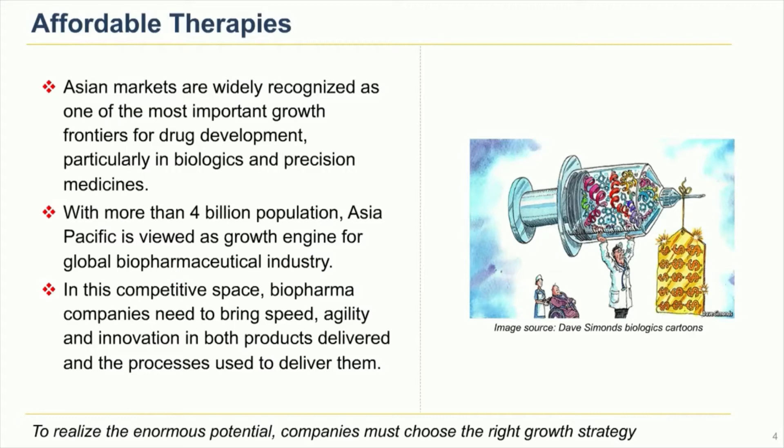Why is that? Because we have a 4 billion population, and Asia Pacific is also viewed as the growth engine for the global biopharmaceutical industry. It is a competitive space, and there is competition in everything that we do. So how do you make a product and how do you win with the product? That's where we need to bring in speed, agility, and innovation in whatever we are doing, in the product that we develop and deliver, including the process that we use to develop that product. All that becomes a part of the affordable therapy that anyone tries to develop. So it has a huge impact, enormous potential for the companies, and they need to choose the right path.

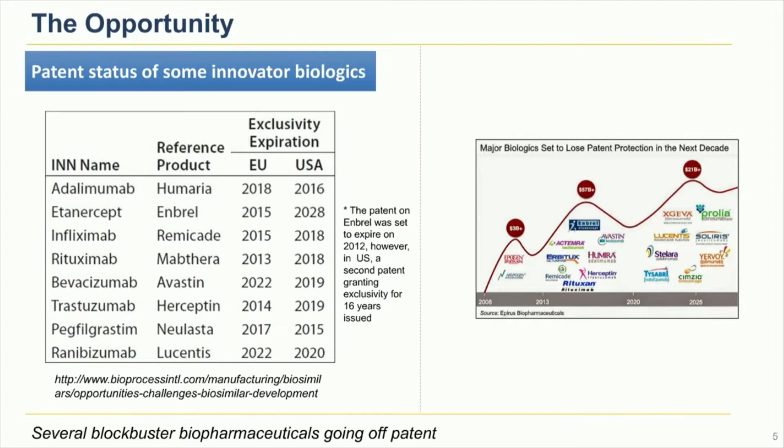Going into slide number 5, I detail the various opportunities that we currently have in the biologic space. It is widely known that many of the drugs are becoming off patent. If you look at the top 8 biological molecules listed on the slide, in terms of freedom to operate, in both the US and Europe, most of the drugs are already off patent, and some of them are very near going off patent, so that most of the companies in the development path have the freedom to develop the product and market the product. This is a list of the top selling products. But what it clearly says is that several biologics and biopharmaceuticals are going off patent, and there is tremendous scope for companies to develop them and take them into the market.

The opportunity starts with the high cost of branded biologics, and also in countries like China, Brazil, Russia, they are trying to be independent. Right now, if you look at the availability of biologics in the space, they either have to import the molecules from countries outside. But that's the area where they're also trying to get into manufacturing and supplies themselves. So that's also giving those markets an opportunity to build domestic biologics.

Okay, I'm going into slide number 8. I'll talk about the regulations. We see the regulations are also evolving. Not all countries have the same type of regulations. From the guidance point of view, we already have detailed guidance from EMA, the US FDA, and WHO, which have set the general principles on how to demonstrate biosimilarity in terms of quality, safety, and efficacy.

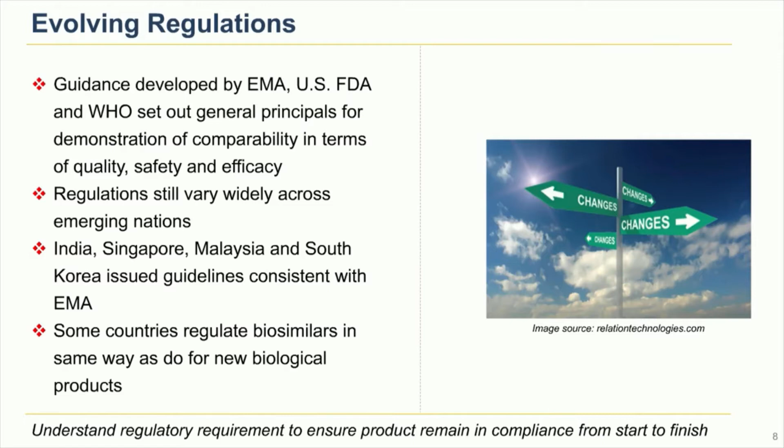Some countries have their own regulations, and sometimes they look at a biosimilar molecule as a new biological product. That's the way their FDA looks at it. So it's very important to understand the regulatory requirements to ensure that the product remains in compliance from the time we start developing till the time we push the molecule into the market. That's about the regulations. Let me go to the next slide, slide number 9.

Right. Let's see. Cost of goods is again a buzzword in manufacturing. Be it development or manufacturing, it's the buzzword. Why is it important now? When we start investing, it becomes very important. We need to understand when to invest, where to invest, and how much to invest. If we invest in too small a capacity, sometimes we may face stock-outs because we're not able to make as much as the market needs. If we invest in too much, it adds to the overheads and the cost of goods goes up.

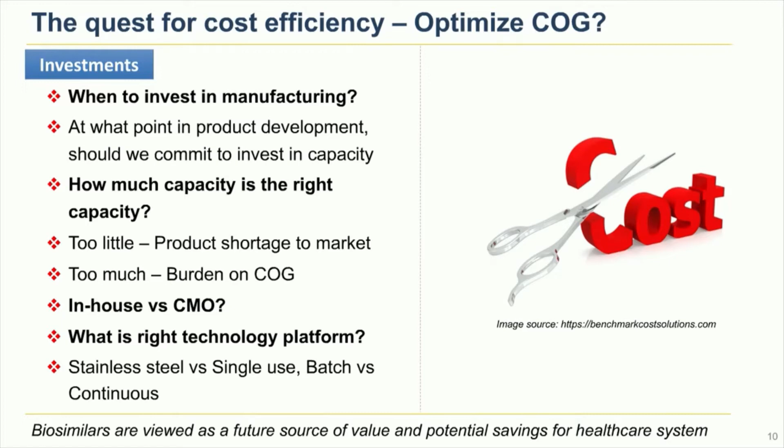We also need to take a balanced view on whether we should do it all in-house or go to a CMO and take their help in developing and manufacturing the product, and what the right technology platform is. So that's where I'm going to spend the next 10 minutes, on the various technology platforms we have. Should we use stainless steel or single-use systems, and should we do a batch process, perfusion, or continuous? These are the various questions one needs to ask and work on when working towards cost optimization.

There will be challenges, and there are challenges. One is funding at the developmental stage, and the other challenge is the scaling. I talked about in my previous slide about the scale of manufacturing. Many times our calculations go wrong on the scale. We assume the requirement at a particular scale, we do everything at that particular scale, and suddenly the scale looks too big and the product goes in the inventory, or sometimes it is too small so that we have to scale up and then do a lot of rework and validation associated with that.

So that's a challenge that we need to understand, and meeting regulatory obligations is again a challenge because of various requirements coming from various areas. And also now, if you look at what's happening across the world, a lot of innovative companies like the big pharma companies are also coming into the biosimilars. That also gives a big challenge and competition to the small biosimilar manufacturers developing the molecules.

Let's see what is the right technology platform. If you put the question, what should be the right technology platform? In my opinion, it should be robust and manufacturable. When you say robust, if you have multiple products, again and again, we should be able to use it for manufacturing purposes. The product that you are making should be consistent, it should be competitive in terms of the cost of goods, and as long as you have a standard platform, we should be able to make the changes both in the product and also in the process. From that point of view, it is important to have the right technology platform.

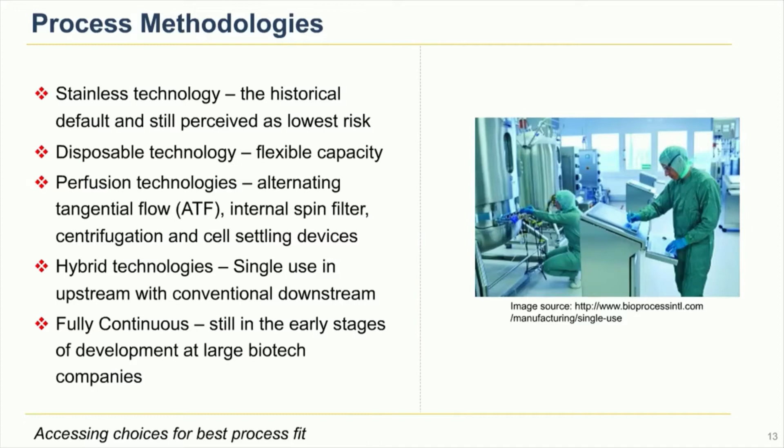Hybrid technologies: someone who doesn't want to spend a lot of money, wants to be competitive, and is worried about the cost of goods. Many are going into the hybrid technologies where they use single use on the upstream and then put the entire downstream in a conventional way of purification. Then we also have a fully continuous system, a technology that is coming up. Everyone is trying to understand it. I would say it's at an early stage of development for the large biotech companies, even though some of the small biotech companies have already started implementing it. So what is important here is assessing the choice of the best fit.

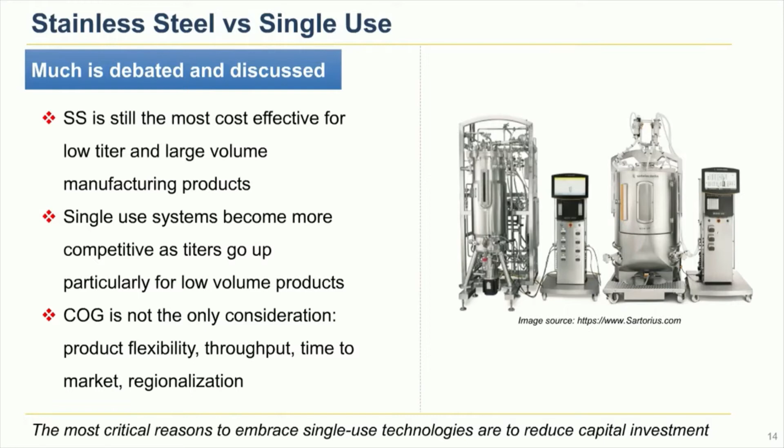The entire volume handling goes down, and cost of goods is one of the considerations that we should bring, but we also look at the flexibility, throughput, and the time that we take for a facility to come up and take the product into the market, and regionalization, how easily we can have the plant set up. All that has advantage with the single-use systems. If you look at the market, most of the manufacturers embrace single-use technology because it reduces the capital investment. Why low capital investment? Because low capital translates to lower fixed costs and less financial risk. That's the reason why single-use has its own advantages. I talked about the timeline for implementation, which is much shorter with single-use systems. It is also flexible, we don't do CIP, SIP, it saves an enormous amount of water, and it is also cost effective for low volume biosimilar products.

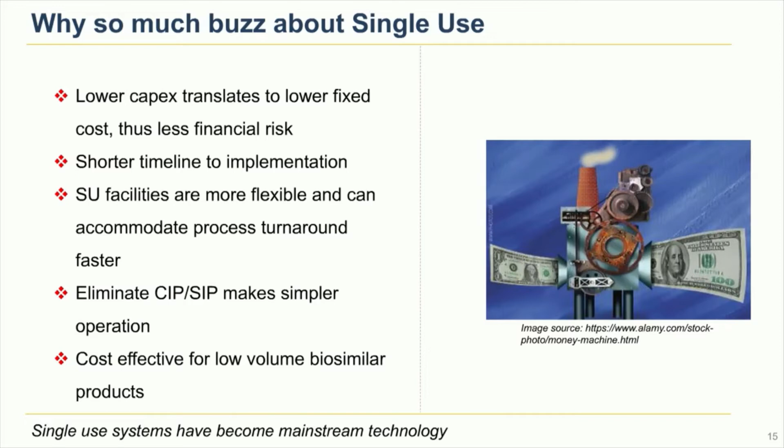If you have a very low volume product, we don't need very large 20 KL fermenters to manufacture these types of products. And most of the companies, as I said earlier, already use single-use systems as a mainstream way of manufacturing. Now, I will introduce this new concept called continuous processing.

By definition, any unit operation is continuous if it is capable of processing a continuous flow input for a prolonged period of time. That's my definition of what continuous is. If you look at the history, this has been adapted in many other industries, like the automobile industry, where it is widely used. But wherever there are capital-intensive sectors, this technology has been adapted. If you ask, are biologics and biosimilars capital-intensive? Definitely yes, it is very capital-intensive.

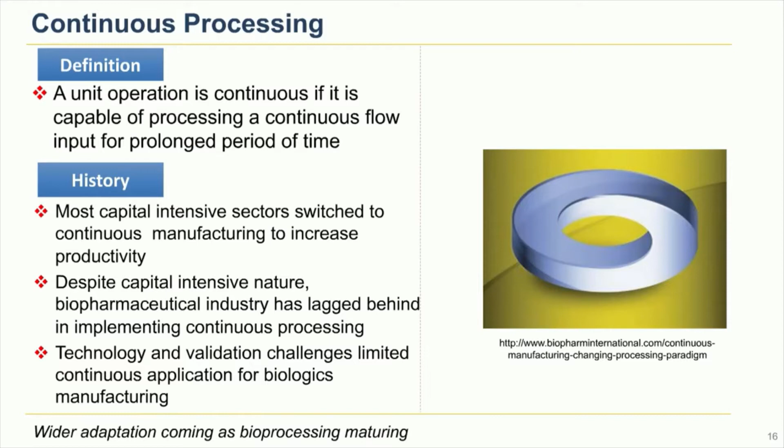But when it comes to the adaptation and validation of continuous processing, it has been a bit slow because of some of the challenges. In my coming slide, I'll talk about what those challenges are. Let me talk about the strategies for continuous manufacturing. I'm on slide number 17.

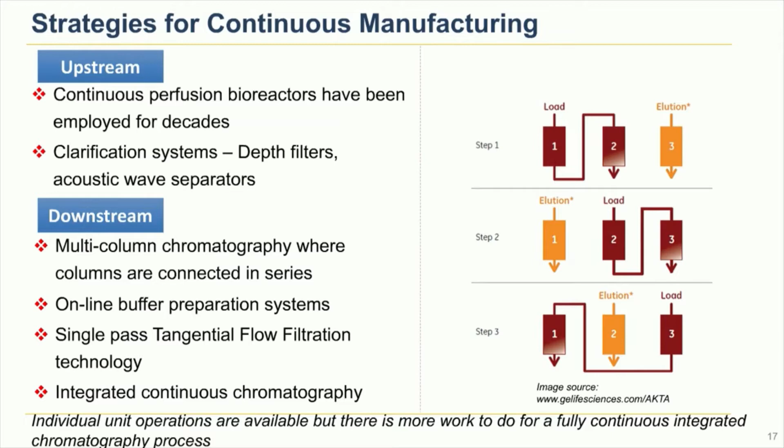If you look at the various options we have in upstream, we have continuous perfusion reactors, which have been there for decades. In clarification systems, we have depth filters and acoustic wave separators, which are coming up now. Downstream, multi-column chromatographies connected in series, online buffer preparation systems, single pass tangential flow, integrated continuous, and a way of integrating all of this are some of the strategies now available in continuous manufacturing. Slide number 18. Let's look at some of these.

What's the advantage that this continuous system will bring in? One is, of course, the cost. Because of reduced cost, it uses smaller equipment, and smaller equipment generally costs less and requires smaller facilities. So the entire cost of running the facility is much less with continuous bioprocessing. Productivity: since they are operated continuously, we need little space for storage vessels and a lot of other buffers that are required in the manufacturing process. And we can expect higher yield. The overall FTE, full-time employee, requirement might be slightly lower compared to the conventional process.

Quality, of course, depends on the product and the process. If you have a product which is a bit challenging in terms of quality as it gets degraded with time, continuous is a way that you have a hold on the quality of the product that you are making, and of course the protein degradation. It also brings flexibility because of more adaptability and facility utilization, and if you want to replicate the facilities elsewhere, I think that's the way it's going to be. And there are a lot of other advances happening in areas like computing technologies and mathematical modeling. All this has facilitated the adaptation of continuous manufacturing.

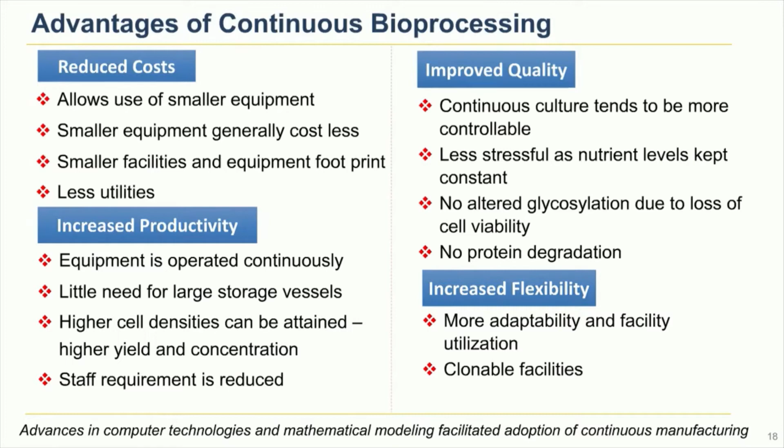Okay, I'm on slide number 19. Let's look at, I think I skipped one slide. Let me go back. Okay. Sorry. I'm on slide number 19.

Let's look at adaptation of this particular technology in biosimilars and biologics, be it a biosimilar or an innovative molecule. If we look at the adaptation, interest is on the rise. I know that from my own organization's point of view, and over the years, FDA has many times been vocal in giving support for continuous manufacturing, which also gives confidence to manufacturers in embracing this technology. It also opened up a lot of options for making continuous manufacturing feasible. I read one report of BioPlan Associates, which says that 10% of current products are being manufactured through either perfusion or continuous downstream processing. So 10% is good to start, and I'm sure in the coming years it's going to go up.

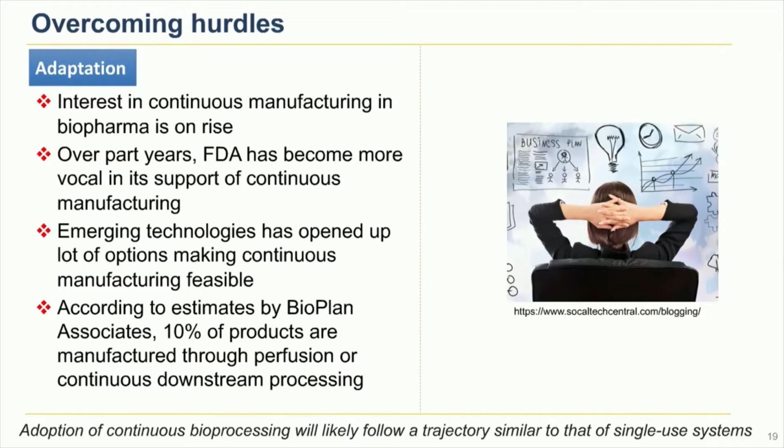One thing I could definitely say is that the adaptation of continuous bioprocessing will very likely follow the trajectory that happened with single-use systems. Now, single-use systems are in every facility that we go into, and likewise, as we move forward, I think we're going to see similar adaptation of continuous technology in almost all manufacturers.

This is my last slide. In conclusion, I'm going to say the markets for biosimilars are growing exponentially. We have seen that not only in Asia, but in every emerging market also. And it's very important to have smart technologies. That's the key for the success of biosimilars in these markets. And from the Asian market point of view, Asian markets offer huge potential for local and global pharmaceutical companies which are developing these innovative treatments.

And the companies will be successful only if they strip away the cost and deliver the value-driven product at a price that the market requires or the market demands. And similar to single-use systems, the continuous bioprocessing in the near term will see a very increasing adaptation.

That's all I wanted to say and talk to you about these various technologies, various technological solutions which are available for all the manufacturers who are in the biologics space.

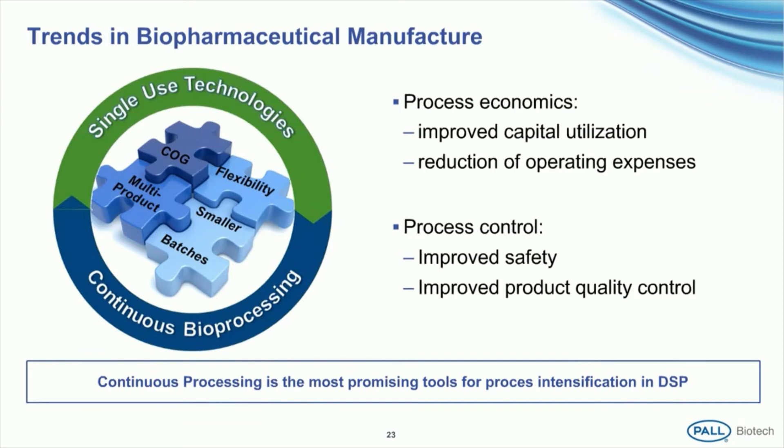After cell harvest, we're using the exact same process steps, including, for example, same filtration media, same chromatography resin, identical buffer systems. However, the unit operations are interconnected, and this allows one integral product flow throughout the whole chain of unit operations. This utilizes the unit operations more efficiently and at the same time avoids long hold times in between the processing steps. The unit operations also typically can be downsized because now the product flow rates are generally lower. And this scale down, of course, translates into cost saving, especially if we imagine, for example, high-price chromatography resin, which now can be scaled down in the column size.

However, to run such a process, we require technologies which are capable of dealing with constant flow conditions. So it's got to be technologies that can tolerate a continuous inflow, but also deliver a more or less continuous outflow of product. Certain technologies that we know from batch processing today can already handle such conditions, thinking of, for example, a filtration step or a flow-through chromatography. So these operating steps can be directly translated into a continuous process. For all other steps, however, we do require technologies which are specifically developed for continuous processing.

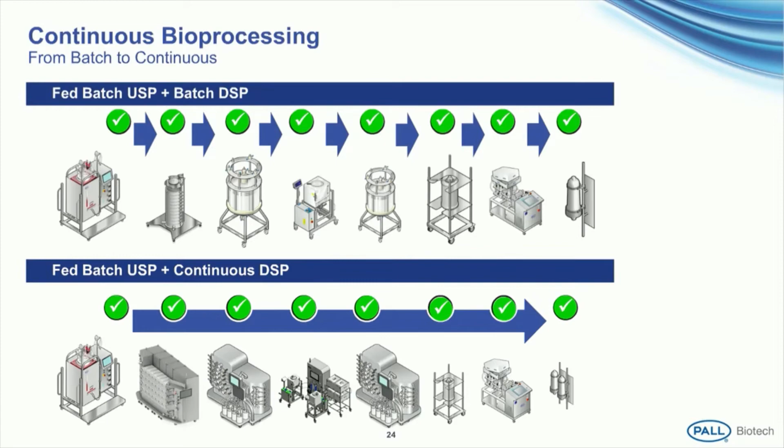And in this context, Pall has developed technologies in 3 core areas of downstream processing. So I'm now moving forward to the next slide. You can see here the overview of the 3 core aspects where Pall has created the new technologies. In the clarification segment, we work with acoustic separations. There, cells are separated from the supernatant using newer 3-dimensional acoustic waves.

Benefit of the acoustic separation is that it doesn't block, so it can be easily used over longer periods of time, for example, in a continuous setup. In the next area, which is the purification, we can count on the Cadence BioSMB system, which is a multi-column chromatography system. It allows us using up to 8 columns for continuous chromatography. You've already seen a schematic of such a multi-column chromatography in Ravishankar's talk.

Now, in antibody purification, a low pH virus inactivation typically follows the capture chromatography. And here we work with the Cadence virus inactivation system, so that's the system on the right-hand side in the purification section. And this system allows us a continuous low pH inactivation of the eluate coming from the BioSMB chromatography system.

In the last section, which is the formulation, the batch process typically relies on TFF systems. So they are used for concentration and diafiltration steps. However, those TFF systems normally use a recirculation loop, and you can imagine this is not compatible with the continuous flow that we need in our processing. Therefore, we're applying single-pass TFF technologies, both for concentration and diafiltration.

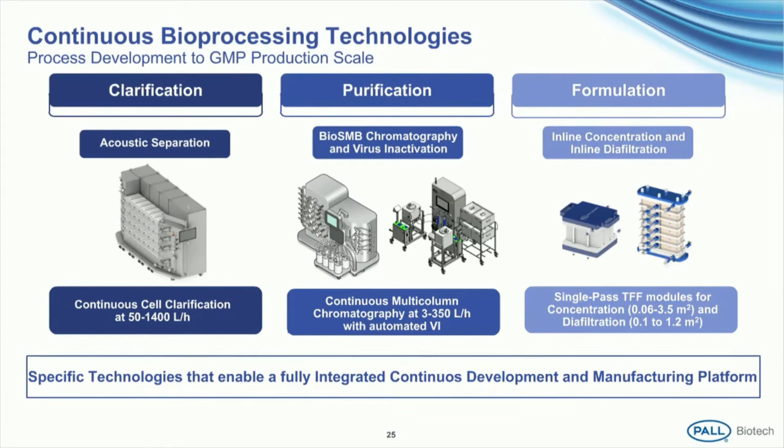So with this portfolio, we have the full range of products that we need for PD scale continuous antibody platform setup. And when we look at the GMP-compatible large-scale version of all these technologies, the majority is available already, and the rest are being developed as we speak. So there is a whole platform of different products which allows us to move forward with continuous processing. In the next slide, I'd like to show you how these technologies can be implemented, can be hooked all together to make one continuous antibody platform.

In the next step, a multi-column protein A capture chromatography is performed. This is performed on the BioSMB PD system. Right behind the system, the eluate is continuously inactivated using a low pH solution. And then when we move further downstream, the product is polished through a flow-through anion exchange and a mixed-mode cation exchange chromatography, both implemented on the second BioSMB system. Finally, the product moves to the right-hand side of the laboratory, where virus filtration, then concentration, diafiltration, and final filtration are all performed.

Altogether, this laboratory contains 14 to 16 unit operations, which can produce up to 6 grams of purified antibody per hour. So when you step into this laboratory, you'll find that all of the unit operations are constantly running all at the same time in order to produce our product.

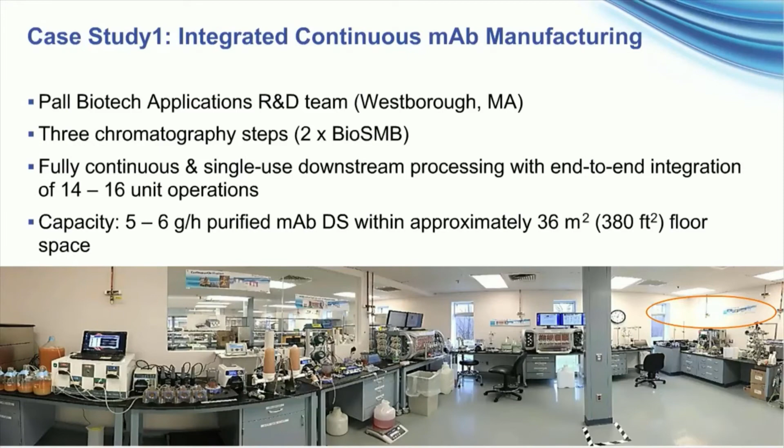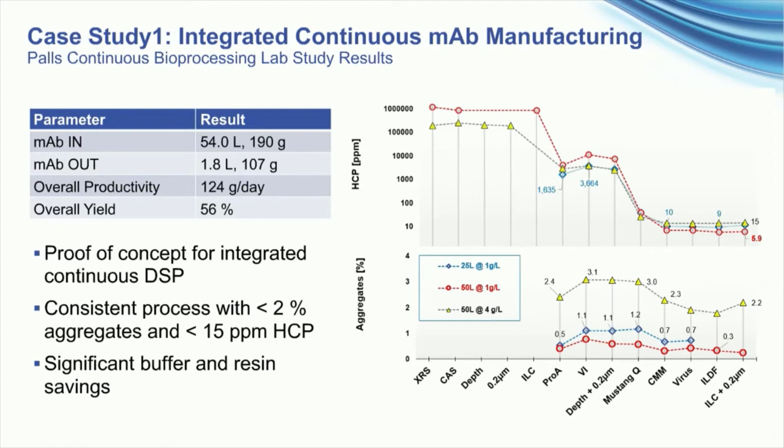These results provide proof of concept for continuous antibody manufacturing. What I'd like to show you in the next slide is that through implementation of continuous technology, chromatography resin and buffer consumption can be significantly reduced. These are results from the same platform that you've just seen, and it's a direct comparison of a 25-liter bioreactor processed with a batch downstream process, the left column, and the right column shows the same bioreactor, but clarified through a continuous downstream process.

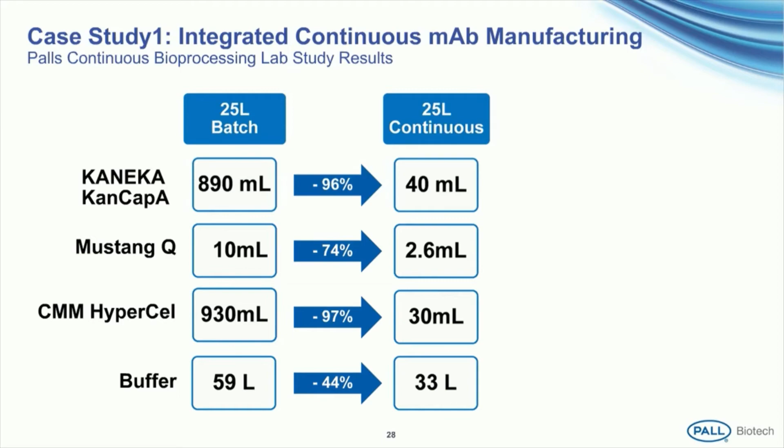And what you can see here is the resin or sorbent consumption required for the protein A step. That was used with the Kaneka KanCap A protein A sorbents. Then the Mustang Q, our anion exchange membrane, and the CMM HyperCel, the mixed mode cation exchange chromatography sorbent. You can see that through all three steps, the consumption can be significantly reduced. Going along with smaller column volumes, the buffer consumption also comes down in this platform by somewhat over 40%. So these are very promising results that show the proof of concept of continuous bioprocessing, and I'd now like to show you some further examples from the industry.

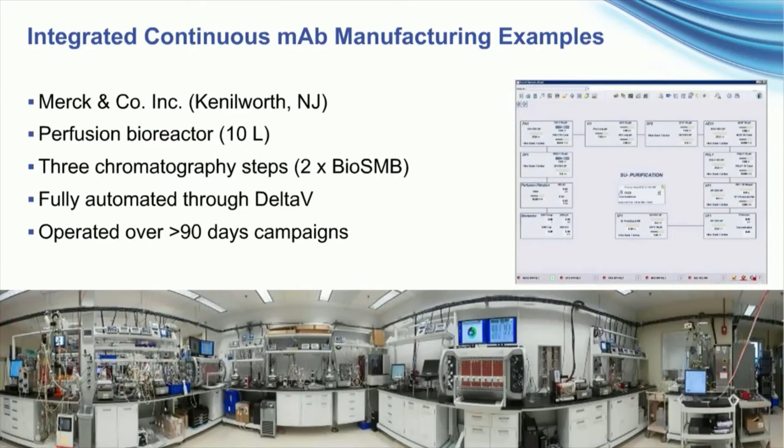The second example I'm showing you here is the integrated continuous antibody platform from Bayer. This is in Leverkusen in Germany. It's a project called MoBiDiK, and their continuous setup also starts with a perfusion reactor, which then leads to multiple steps of purification all the way down to drug substance. Bayer has also automated their process using Siemens PCS7, and they achieve outputs of roughly 25 grams of antibody per day.

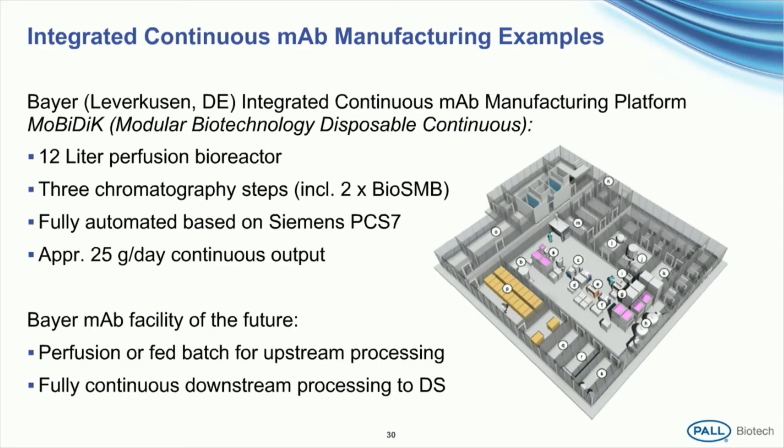The 3 examples that you've just seen are all fully integrated continuous processes. Thereby, all the downstream processing unit operations are connected, and even upstream can be added to the chain of unit operations. Some early adopters, including Bayer, Merck, or MedImmune, have successfully created such processes already. This concept makes very intensive use of the benefits of continuous processing, but it's also the most advanced setting, as you can imagine. Therefore, what we see most often in the market today are hybrid processing scenarios.

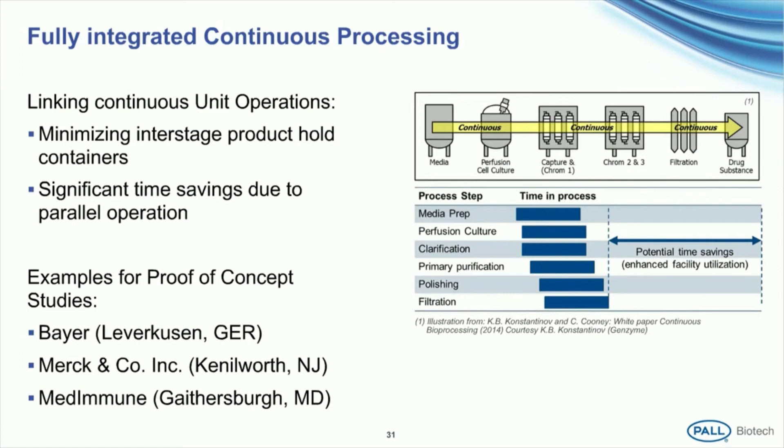Hybrid processing is shown in the next slide, and it is a mix of batch and continuous technologies with the goal to best meet the production needs. In hybrid processing, only a fraction of the process gets translated to continuous. So we start off with a batch process, and we look out for any bottlenecks or very cost-intensive steps. Typically for an antibody process, that would be a protein A capture step, for example, maybe followed by the low pH virus inactivation and probably a second chromatography step.

So we are looking for those steps which are most painful, let's say, in our production platform. And we translate these steps into continuous in order to make them more sustainable and more efficient for our processing. However, all the rest of the process remains in batch mode. And the experience that we've obtained in different case studies and work with customers so far shows that hybrid processing is a very attractive scenario for biopharma as well.

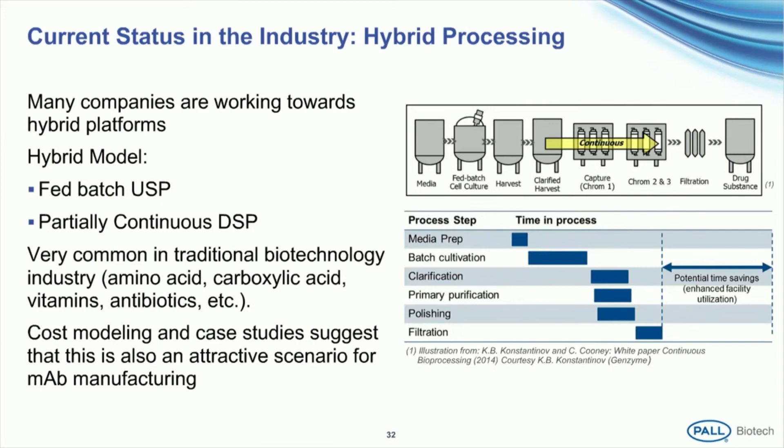I would now like to move into some more case studies, giving you a bit more detail on the hybrid and integrated continuous process. What you can see on this slide is an example of a hybrid process, because we are specifically looking at the protein A chromatography step. This data was generated and published in cooperation with Sanofi Aventis in Frankfurt in Germany. Sanofi Aventis has tested the impact of continuous chromatography on the protein A capture step of their antibody process. Sanofi first performed reference studies with their batch process, to see what the baseline process looks like in batch currently, and then they translated this

process onto the small-scale, process development scale continuous chromatography and from there performed a scale-up onto the GMP-compatible large-scale chromatography system. All of this was performed using the BioSMB system from Pall Biotech. The study was carried out for 3 different operating points. That means that 3 different binding capacities and residence times were tested, just to have 3 scenarios available for the protein A chromatography. The results show that all continuous settings in this study could give 4 to 5 times higher specific productivities when compared to the batch reference process. That means that they could produce more grams of product per liter of resin per hour of processing time. In addition to this, the product quality attributes were assessed.

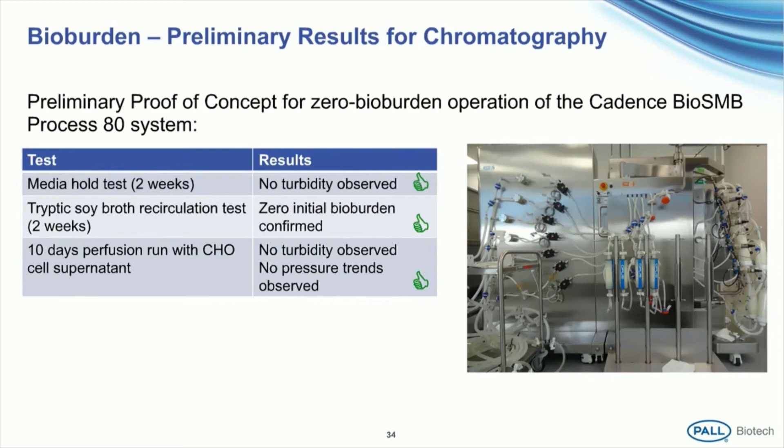In the last step of the testing, a protein A chromatography step was performed over the course of 10 days together with Sanofi Aventis. The aim of this study was to verify the bioburden stability and process consistency under real process conditions. In the next slide, I'm showing you the results of this assessment. We were using a 3-column process with gamma irradiated protein A columns operated over the 10 days.

What was also assessed was yield, impurity removal, and product quality, and here we can also see very consistent results. In addition, what's very important as well, no bioburden was detected, which again confirms the proof of concept that this closed single-use chromatography is suitable for operating over an extended amount of time, especially under GMP conditions.

With this, I'm closing the case studies, and I would now like to spend some time on regulatory aspects, as Ravishankar has already started in his presentation. With biopharmaceutical manufacturers moving towards the implementation of continuous processing under GMP conditions, the regulatory aspects gain more importance. We know that both the FDA and the European Medicines Agency recognize the benefits of continuous processing, and Pall has also actively engaged with regulatory authorities in multiple geographies to receive their feedback on validation strategies, but also to educate them a little bit on continuous bioprocessing, since this is still quite new to all of us.

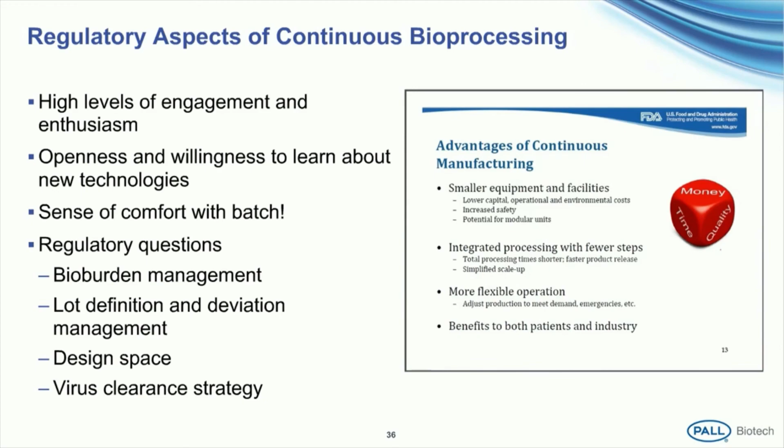So we could say, even though the process is running for several days, every 24 hours, that would be a batch. It could be also based on volume, so you could link a certain amount of end product to be a batch, or you can base it on the raw materials. For example, if there are several bioreactors leading into the same continuous downstream line, the batch could be linked to the raw material of the bioreactor. So you can see that the regulatory authorities have given a lot of room for the definitions here. Now, recommendations like I've just shared a few are available in much more detail and for more questions, and we're always happy to share them with you in separate discussions.

Various case studies with our end users have shown the benefits of continuous processing, including improvement in process economics, but also process control. The technologies to implement such processes are available today at PD scale, so for process development, and the majority of the process steps can already be translated to GMP large-scale process scale. Regulatory challenges are currently being addressed, and we're expecting the first submissions of biopharmaceuticals involving elements of continuous downstream processes to be filed very soon. So it's an exciting field or area to be working in at the moment.

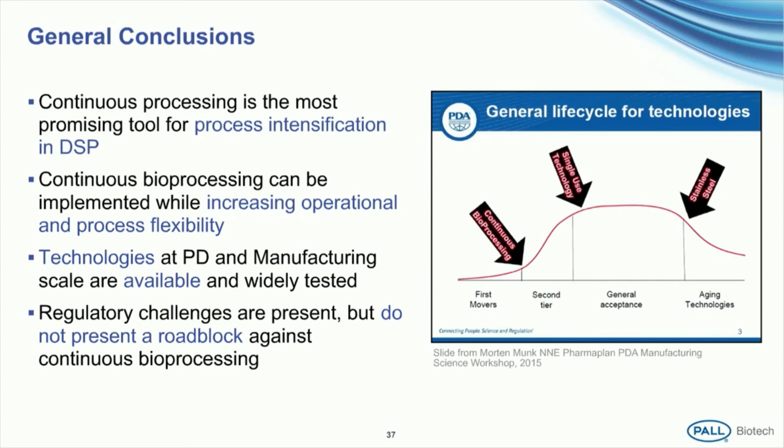Thank you, Britta. Now we'll begin the question and answer segment of the webinar. Once again, I would like to remind our audience that you can still send your questions in via the questions tab on the right-hand side of your screen. Now, our first question is, what are the prospects of biosimilar manufacturers in Asia?

Yeah, Stephen, I'll take that. The question is about what's the prospect of biosimilar manufacturing in Asia. So I will again go back to my presentation where I talked about the high price of the branded biologics and not being able to reach many of the patients across the world.

Because of that, the birth of biosimilars, and biosimilars are being endorsed now everywhere, from underdeveloped to developed countries and markets. If you look at the prospects, the disease patterns, the use of biological drugs, the huge population, the health awareness being created, the economic growth in developed and emerging markets, the price sensitivity and regulations, and more and more budget being allotted.